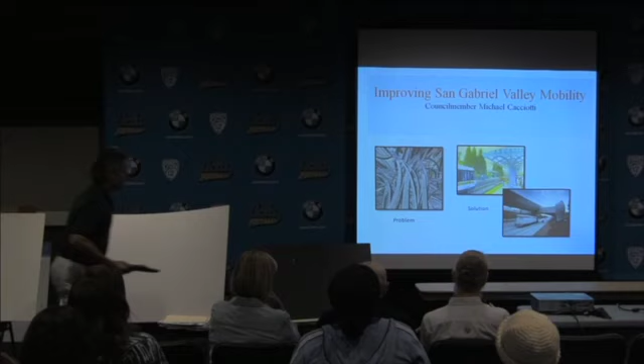Thanks, John. You did a lot of research on us here. Excuse the dress—I just came from a mulch compost giveaway in South Pasadena where we were shoveling for about 2 hours. A little dirty, I didn't have time to change on the way over here. We're very active. Claire, thanks a lot.

I'll go through it—if John or Claire just want to jump in, feel free. We'll title this 'Improving San Gabriel Valley Mobility' because Caltrans is always focusing on just this north-south, one little tunnel type of thing. We're looking at the big picture.

I'm going to put it in perspective today for you. The problem is what would be created by more freeways, more tunnels—almost a spider of freeways and junctions. The solution we really feel is mass transportation: light rail, heavy rail, etc. You've got the iconic bridge structure there over Baldwin near the 210 eastbound.

So, a little perspective—let's go back to 1944, World War II era. This was the Pacific Electric Railway, and this was their footprint at its height. Look here: 4 counties.

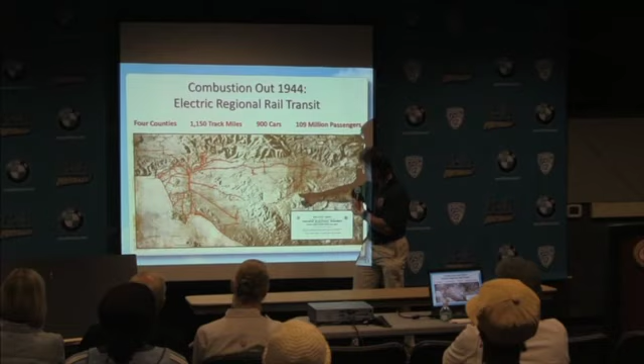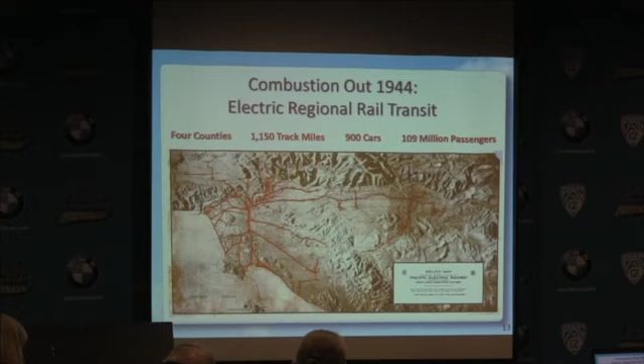I also sit on the South Coast AQMD—these are our 4 counties: LA, Orange, San Bernardino, Riverside. Look at this system all the way to San Bernardino, all the way to Riverside, all the way to Orange County, along the beaches, Pasadena, all this area along the foothills, San Gabriel Mountains, San Bernardino Mountains. That was a system that existed in 1944, started in the late 1800s with the railroads.

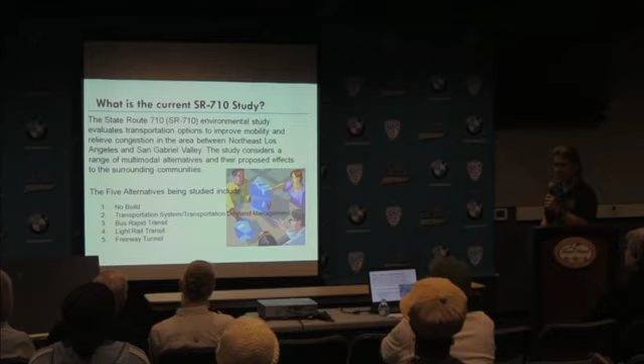Look at it—109 million passengers every year, 1,150 miles of track. We're getting back to that. So what's this current study Claire was talking about? Just some bullet points called the SR 710 Environmental Study. What are they evaluating? Let's look at what Caltrans and Metro are doing.

Transportation options to improve mobility. How can we get people from A to C or A to D fast? Relieve congestion, all the backup on our freeways.

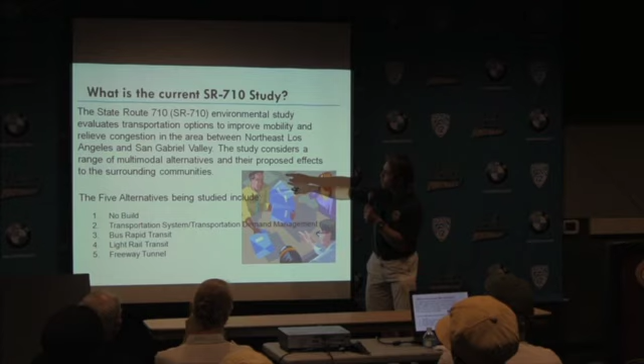Northeast, let's look at the area. Northeast Los Angeles, San Gabriel Valley, they consider a range of multimodal alternatives to propose effects. Here are the 5 alternatives.

And these are the final 5 they're studying. They're having meetings every month. There's a meeting this Thursday. They have different groups - one I go to is called the Stakeholder SOAC, Stakeholder Outreach Advisory Committee. They allow us elected officials and committee leaders to come. They kind of just tell us, and we always raise our hand and I protest. They take the minutes down, but they don't listen.

So here's the 5 alternatives: no-build, transportation system and demand management, bus, light rail, freeway tunnel.

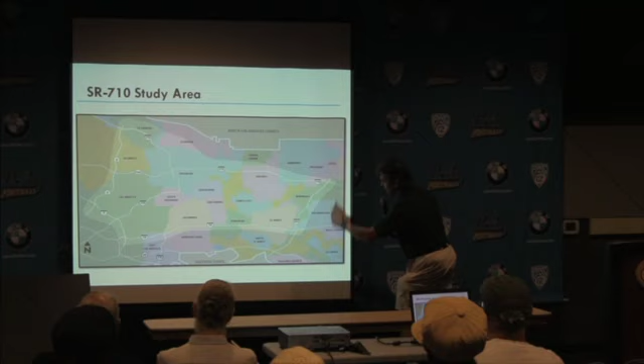Let's look at these. Now, this is the study area. Imagine what we did - they almost took a hand where the 710 kind of stops right here, and they looked west, straight, and all the way out east. So we're looking at the 60, the 10, the 210, all the way out here to the 605, Baldwin Park, West Covina. But notice over here too, they kind of taken Glendale, Northeast Los Angeles, all the downtown area over here. So this is kind of their study area.

You try to understand what Caltrans and Metro are looking at. This is a study area that they're going to assess. Now, they developed this purpose, and we feel they really got to re-examine it. I'm not sure if it's accurate.

The lack of continuous north-south transportation facilities in the study area affects overall efficiency of the larger regional transportation system. So it contributes to cut-through traffic. So this is their purpose. This is why we're doing a study. And there's a problem with traffic in north-south.

But we think what they forgot to do was look at east-west, and I'll show you in a little while. You're going to see along the 10, the 210, the 60 freeways why just looking north-south without putting this in perspective, without looking at these, all they're doing is looking at this. That's their purpose. So already at the beginning of the study, we think there's a flaw. You've got to really look at all the traffic, because traffic doesn't just go north-south - it comes in and goes downtown.

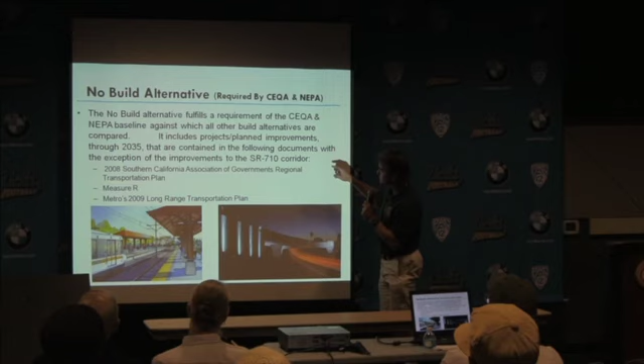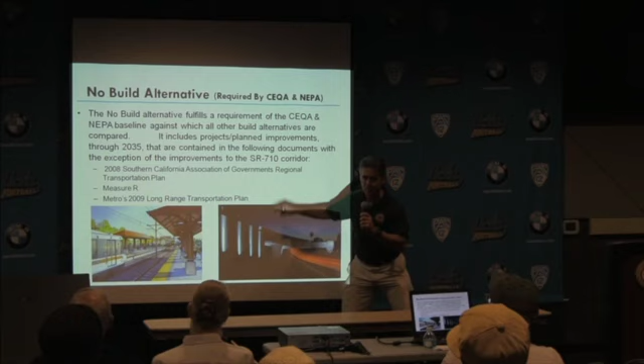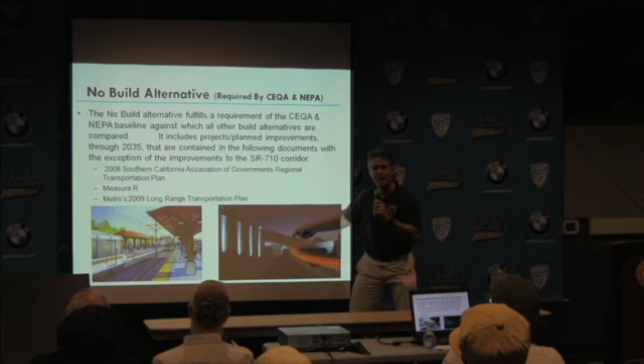Now, this is the first, the no-build alternative you saw. And that means we don't have to do anything. But why is this? It's required by NEPA, CEQA - California Environmental Quality Act, National Environmental Policy Act. So there's already a Southern California Association of Governments - that's 5 or 6 counties that come together, and they have what they call a Regional Transportation Plan, RTP. If you didn't build anything at all, if you didn't build the 710, whatever of those 5 options, just there - hundreds of projects, and Metro's dozens, hundreds of projects, would make massive improvements to transportation just by themselves, without even doing any improvements. They've got the Gold Line extension opening in 2015 to Azusa.

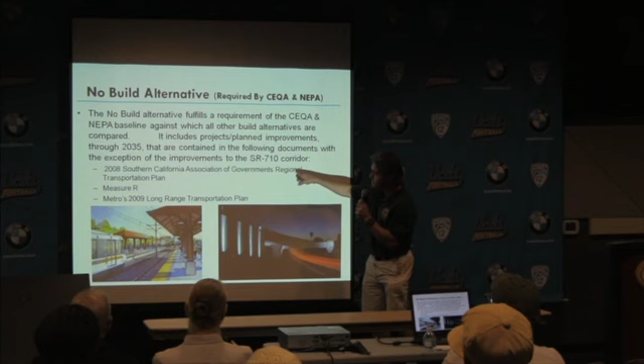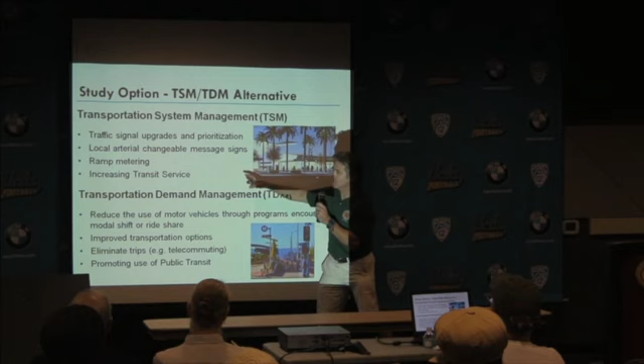So those are considered. Now, this is what they call TSM, TDM, the second alternative - we're actually combining 2 of them together here. Transportation System Management - all it is, where the 710 ends in the Valley, let's improve that junction, let's improve that intersection, get traffic off there and move more smoothly. Transportation Demand Management, basically promoting public transit.

Have you ever tried to take a bus? Some of our students, ask any of you to go to, take a bus out to Cal State LA, take a bus out to Cal Poly Pomona - how long does it take? So a couple of our students in South Pass go to Cal Poly Pomona, and I said, you know what, I'm going to go out with you one day and see how long it takes you to get out there.

How long do you think it took when I caught the bus at Mission and Garfield to get to Cal Poly Pomona? Two hours and ten minutes. Transfer in El Monte, in the middle of the street, an industrial area, sitting there for 20 minutes waiting for the next bus. It's got a good foundation, but it's a very poor system. It's got to improve significantly.

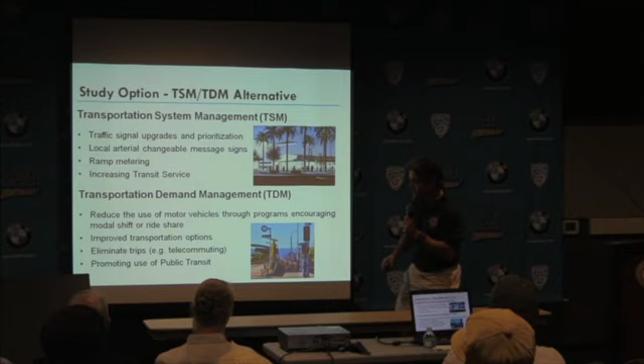So that's what these would do, really improve the system, so people can say I want to take a bus but I don't want to sit there and transfer three times to get to Cal Poly Pomona, sitting in the middle of El Monte in an industrial center at 7 a.m. It's not very safe.

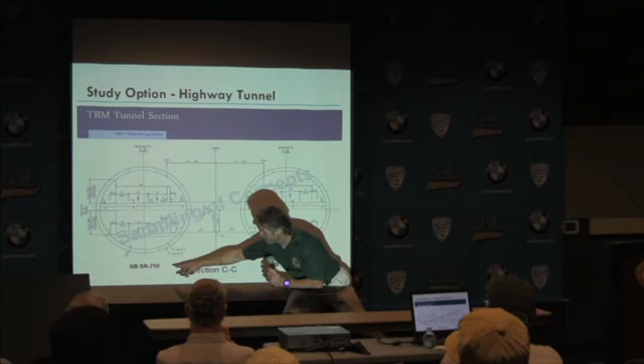So here's the tunnel option Claire talked about. This was a first: two twin-bore tunnels. There's one bore, here's the second bore. Southbound SR 710, northbound, two levels. Both going northbound at the top, both going northbound at the bottom, and you've got shoulders for emergency vehicles.

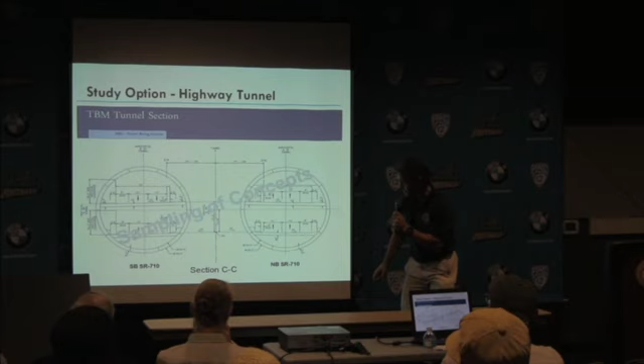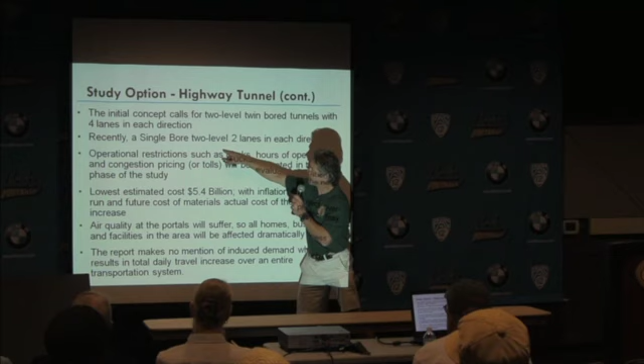Claire talked about the size. Recently they came up with the initial plan of two twin-bore tunnels with four lanes each direction. Just a couple months ago, they came up with a single-bore tunnel option. So instead of two, we'll have one. At the top, two will go north; at the bottom, two will go south. We're wondering why they're doing that. Maybe it's to save money and bring the price down. I'm not sure, but that just came out of nowhere recently, one of their revisions.

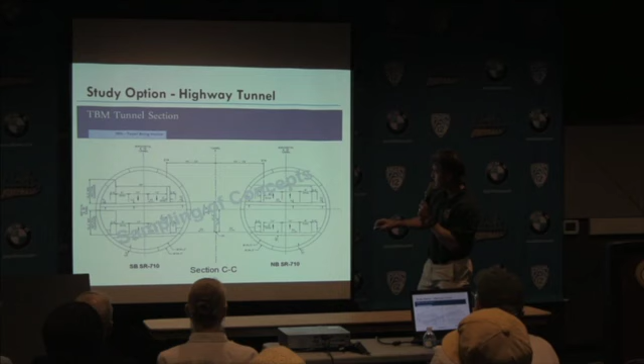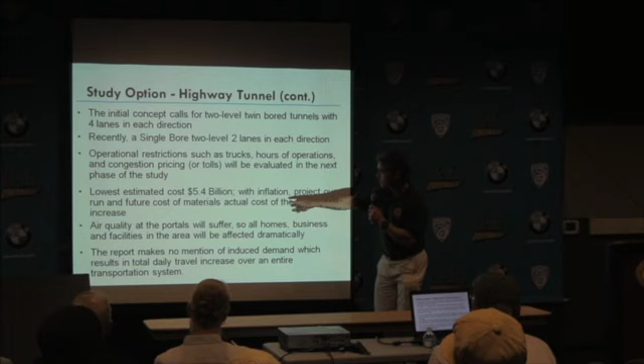Other operational things Claire talked about: will there be trucks? They say no, but we know the trucking industry, ports, goods movement, hours of operation, tolls—all these issues, we're not sure what's going to happen. They keep changing every month. The cost, $5.4 billion, has been estimated low. We've heard as high as $10 to $15 billion.

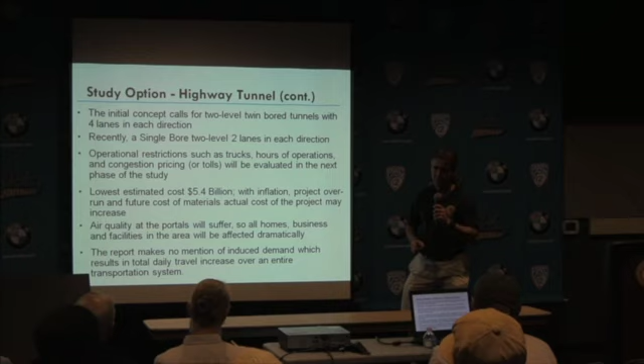Air quality in the portals as you come out—they say there's technology to test it. I'm on the AQMD board, I've been to Washington, met with the EPA. There's no guaranteed technology now that can actually clean it up. They say there is; I haven't seen it.

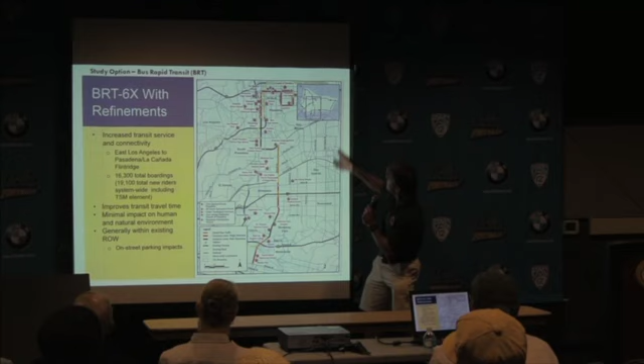So this is the other option: a bus, BRT, bus rapid transit. Let's start down here. This is the 60 freeway, up to the 10, the 210's up here, this is right around Atlantic. Just below the 60 they would improve the bus. There's already existing bus service, the 260 line. I've taken it a number of times, and I've ridden my bike down here.

So it starts here below the 60 and would go up. These different colors, yellow and brown, might mean some lanes are dedicated just for the bus, or shared. This section would be just dedicated for the bus. We haven't agreed to it at South Pass, but that's what they're trying to say—it would be a really rapid bus system, better than they have now, going all the way up. Which is good, we need that improvement.

Take the Gold Line where it starts up here, come all the way down through Los Angeles. You've got a great stop in Little Tokyo right there, some great restaurants, and you continue through Boyle Heights, get over to East LA Civic Center—the courthouse, the health department, the sheriff's station, the library—thousands of people using that. It ends right here at Atlantic, in the middle of nowhere, about 300 feet south of the 60.

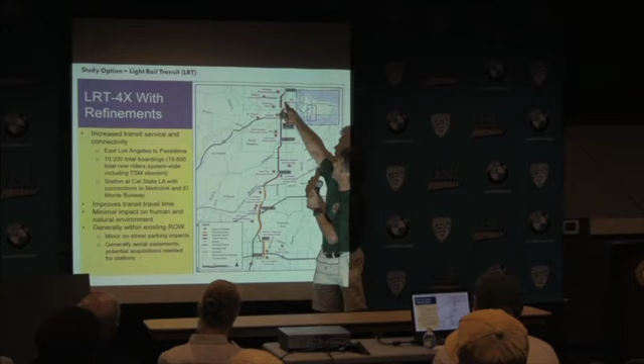What they want to do—and actually it's a nice start of an idea—is start a light rail that would go along the ground, then kind of go along the 710, elevated all the way to Cal State LA. Great, you've got 26,000 students or so at Cal State LA, stop there. Then continuing, when it hits Valley, go underground, stop in Alhambra, South Pass, connect up with Fillmore Station.

Now here's a problem—you know what they miss? Let me show you. Sam, can you turn that big one around? Is it turned around? Okay, look over here.

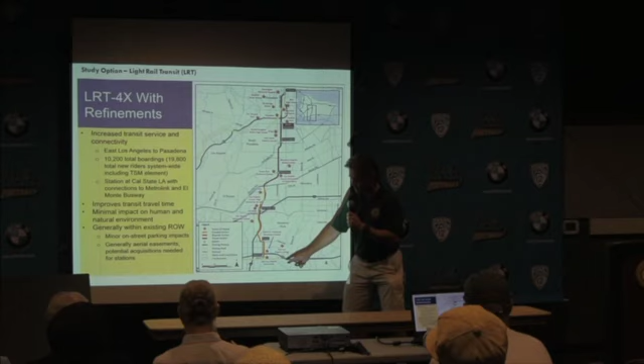They're going to measure how many cars go through the tunnel versus how many people are going to take the light rail. Well, it starts down here, it's going to stop in the middle of nowhere at Floral, and it'll get Cal State a lot of students - there's 26,000 students and teachers. That may get a couple cars off.

Guess what they're missing? We bring this up every time at the meeting, I'm there every month. You see something here that said East LA College? Guess what - if you look right here, the second stop right before the final stop where it ends, right below the 60, not even 0.7 of a mile north - I've walked it, I've done it on my car, I've done it on my bike - they will miss East LA College. Guess how many students go there?

36,000 students, thousands of teachers, dozens of sporting events each month in a stadium with soccer games, football games, baseball, softball. So they deliberately skipped it and go to this little street called Mednick, which I've been on my bike - there's nothing but a couple apartments, condos in the middle of nowhere. They're going to have a stop a mile from the university.

And I say, why don't you have a stop directly there? Why don't you start here and hit East LA College? Why are you going to miss it? It's right there. Oh, well, kids can walk 1 mile to school. You know something? I said, have you been out there to try it?

I rode my bike. So when you're out here, what you've got to do is as you get off of the Gold Line at its terminus, you walk towards the college at night. It's a little dark, a little scary. But not only that, you've got to cross 2 off-ramps and 2 on-ramps at the 60, cars flying off there in the industrial area, and then get up and cut over.

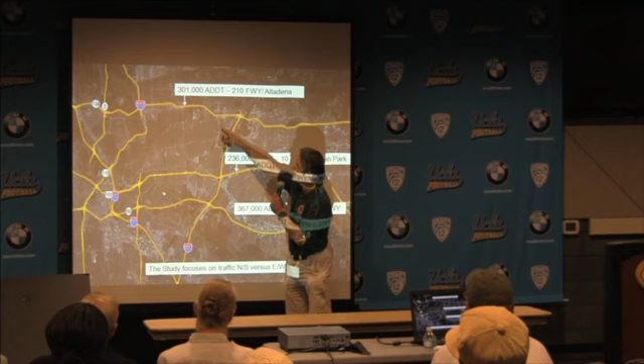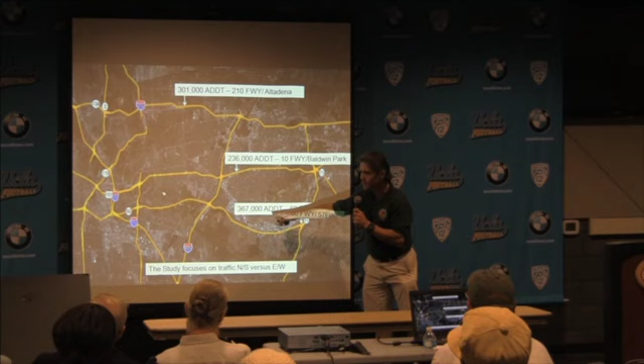These are ADT, average daily traffic volumes on the 710 freeway. In this area, here's the 605, so this is in your area between Pasadena, Arcadia, right here, Altadena - 301,000 cars a day average daily traffic. Here's the 10 freeway, Baldwin Park area right over here, 236,000 a day going eastward every single day. Now look right here, this is one of the busiest freeways in the region, probably the second busiest, right close to the 405. 367,000 vehicles a day on the 60 freeway, just once you get past the 57 right here going to downtown.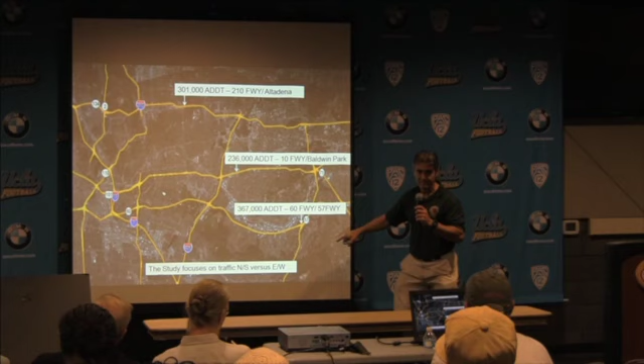So here's a problem, Caltrans - I want you to just put all these things in the back of your head, because when you make a decision, Caltrans is just saying no, we've got this little north-south stuff. What they forgot to do is the fastest growing counties in the state - guess where they are? Number 1, San Bernardino. Number 2, Riverside. Can you imagine what's going to happen to these over the next 10 years as the economy kicks back in? 300,000, 400,000, it's not going to move. And the goods movement, which a lot of this is goods movement coming out of the ports along here, is going to come to a standstill.

They talk about a gap closure. What happened the last time they closed the gap? Remember out here in the 210, they connected it out to the 15?

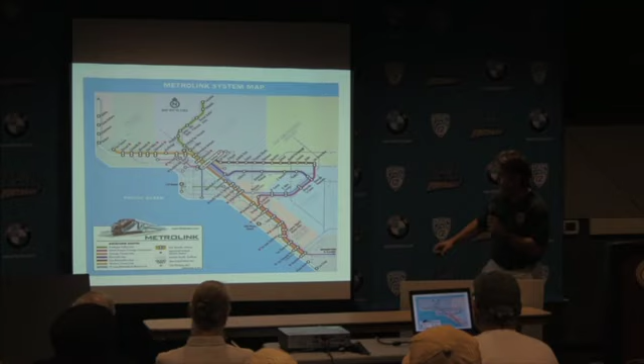This is just the Metrolink system itself. You see all the lines went out to San Bernardino, Riverside, Orange County. And if you haven't taken it, it's exciting. I've gone to 2 weddings in the summer down in Oceanside. You got off at San Juan Capistrano, took the cab right there. Exciting—the Metrolink system's really good now.

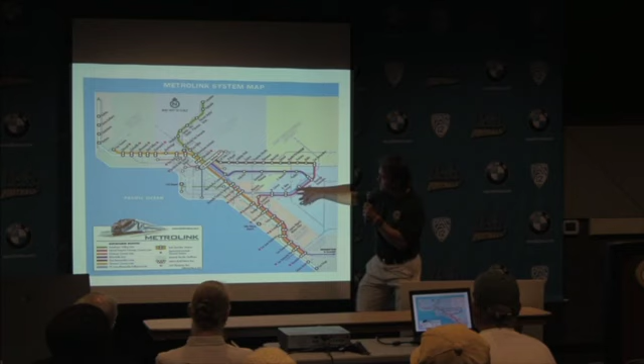Most people take it. It goes to Burbank Airport, all the way up. This is our current Metro system. Again, in 1990, none of this existed. None of this. So in the 60s when Caltrans was thinking, I don't blame them because none of this was here. This was the first system, the light rail system, the Blue Line down to Long Beach.

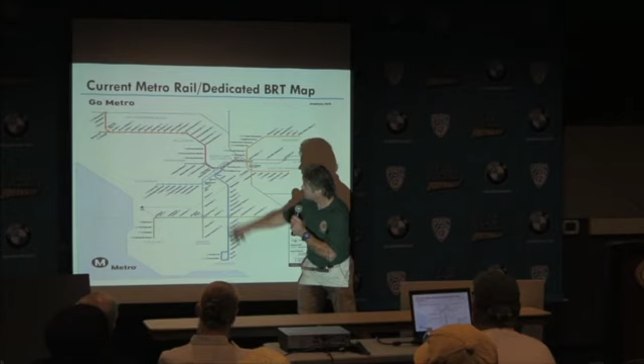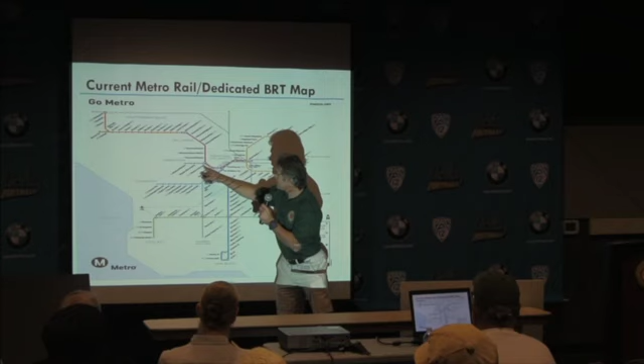There's 6 systems, 2 heavy rail. The 2 heavy rail: the Red Line system out here where it stops at North Hollywood, then you've got the Orange Line, and the Purple Line, which is pretty good. I've taken that just last week, had to go to Western and Wilshire, and it starts at downtown Union Station, at the Gold Line, etc.

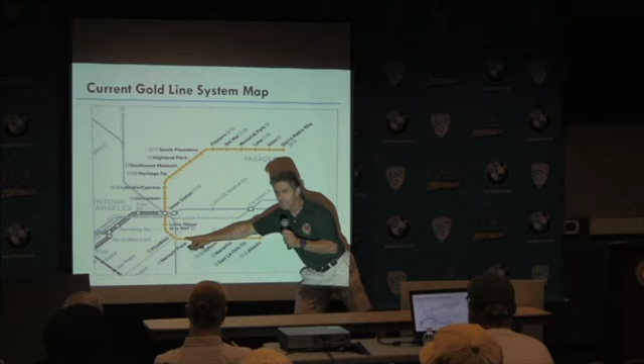So this is our current system, which is excellent. This is the Gold Line system, as you see, Sierra Madre. Please take it one time just to get the feel down here at Atlantic. It only takes about 35 minutes from South Pasadena to get there.

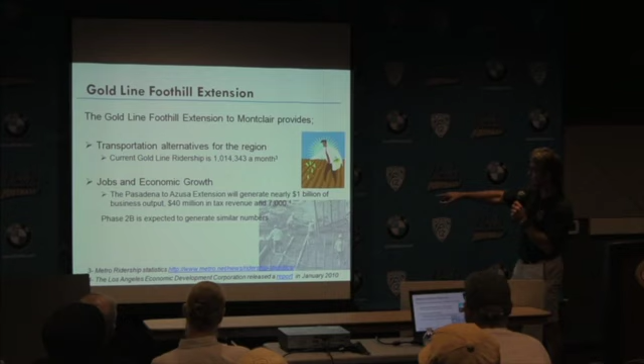Gold Line Foothill extension to Montclair, tells you just transportation about it, what you're doing, the jobs, the growth. Gold Line extension, how much it costs, $735 million out to Azusa, then Azusa to Montclair, $850 million, which we don't have yet.

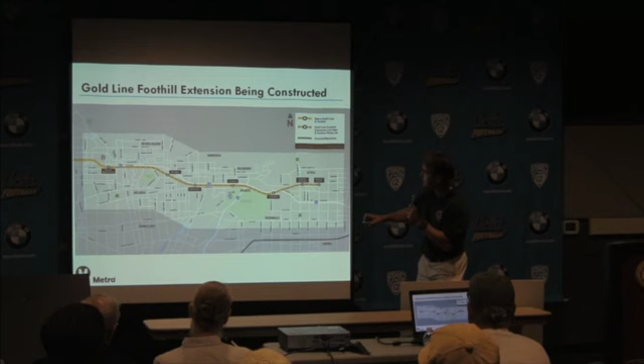Azusa, Irwindale, Duarte, Monrovia, Arcadia. Look at all the exciting things at all the different stations - Ontario Airport, Claremont, Azusa Station, Citrus College. These are right next to each other, right off Citrus on the 210, just north about a mile.

Here's the benefits and bad things that Claire talked about actually. And this is your lungs. Metro and Caltrans say when you open a freeway, it's going to reduce pollution. There's no way - you put another 200,000 cars here, it doesn't.

One of our studies here, let me find this one. We actually did a study in South Pasadena. We had 2 clean air car shows, actually 4 clean air car shows over the years. And we had one where we did a test. I'm your representative on the South Coast Air Quality Management District Board.

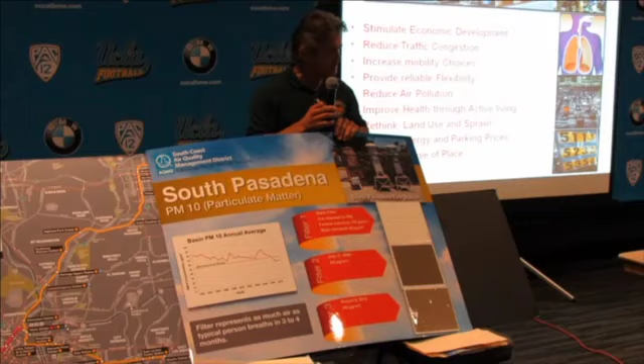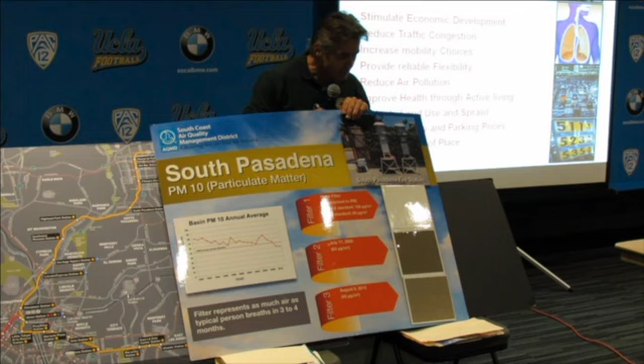So we said, you see these 2 samplers right here? We sampled along Fremont near Mission, right before we get to the 110 freeway there. And we just tested PM, particulate matter - that's stuff that comes from cars, from dust being blown up, from power plants. It's solid particles and kind of liquid particles that get together and you inhale. It causes respiratory problems, things like that. So bad for your health.

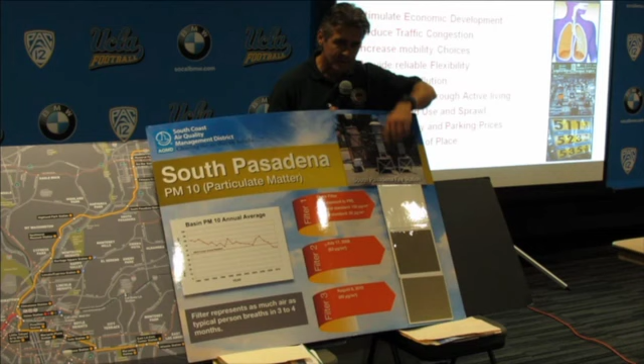So we tested. This was what the filter looked like before we tested, and that's what it looked like after we tested in 2008. And that should have been the 2012 test - actually 12 was better, and the main reason was because the economy went down, less cars on the road. But both exceeded the state standards for healthy air. So that's the air we're breathing in our region right now. And these are the tests that we've done at AQMD, our chemists and scientists have done. There's no way it's going to get better if a freeway is built.

Again, just says more benefits of the stations - economic benefits, billions of dollars, sense of place. Why not, we're saying, why not build out west instead of a tunnel? Take a light rail system out to Bob Hope Airport. Take it so it goes by Glendale Community College, the Americana. Have a light rail system out there.

Just a couple thoughts in closing. Light rail, will it be successful? Here we have the opening of the Gold Line in 2003. 361,000 - look on this side, your left - 361,000 people per month ridership. What's that, about 12,000 a day? Look what it is today.

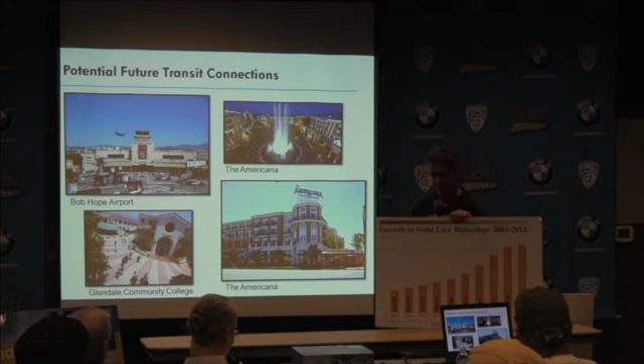In 2013, almost 1.1 million people a month rode it. When that opens up in September 2015 to Azusa, you're going to see that number go up exponentially. And if you've taken the Gold Line like I do every week or every other week, riding my bike on it or taking it to work downtown, sometimes I can't even get on.

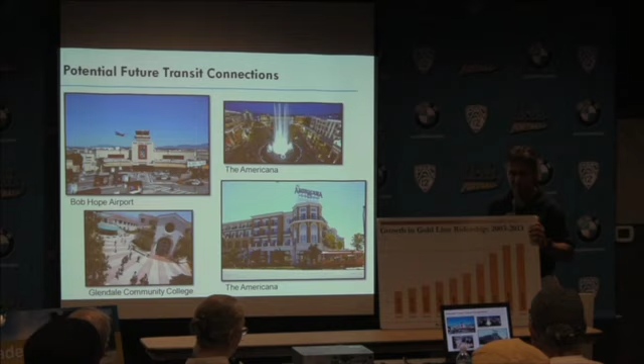It's so packed at rush hour. The secret is, downtown, if you've got to get on the Gold Line, walk over to Little Tokyo Station, because at Union Station you're going to get on but you'll be squished and standing the whole way. It's that successful. I told the council of governments, the mayors, and Mr. Pedroza from Claremont, I said, Sam, you better add more trains. The problem now is you've got 6-minute headways, going to 5-minute headways, it's going to be incredible when this opens up.

Imagine when that goes all the way out to Montclair and the airport. So, big things. Thank you very much for your time.

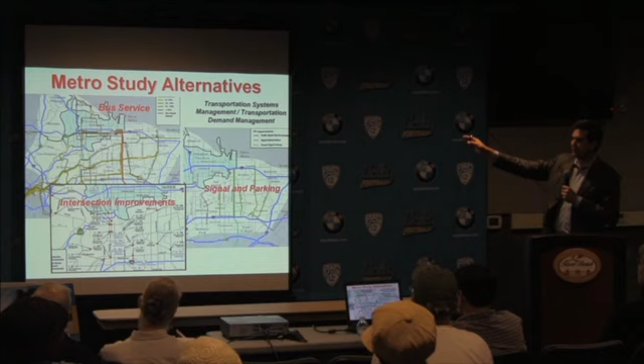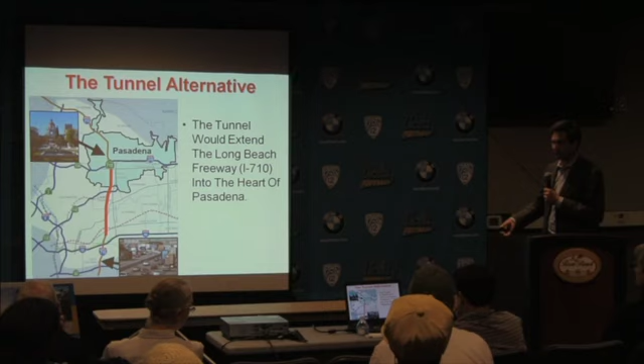While there are a number of alternatives being studied, and I won't go into a lot of detail now because Mike already did—the bus rapid transit alternative, the light rail alternative, the TSM/TDM alternative that Mike also explained—the truth of the matter is this study is really geared towards justifying the tunnel. The reason all of these are being studied is so an environmental impact report can be completed where Metro can say, yes, we did study all these other alternatives. But the big money, the political interests, are clearly behind this alternative, which is the tunnel. As you can see, it starts down here in East LA, Alhambra area, and heads right up into the heart of Pasadena.

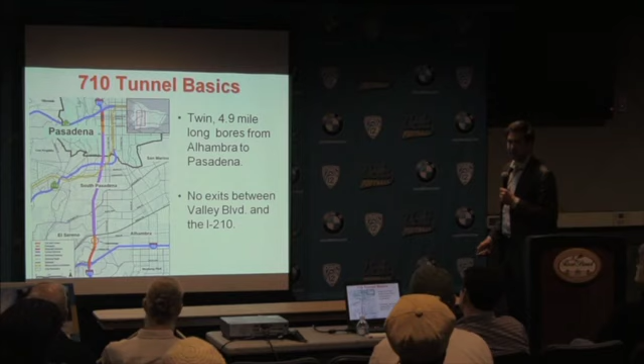So some tunnel basics, and Claire and Mike already covered some of these. They're twin, whether they're 5 mile or 4.9 mile, I'm not going to debate. Whatever they are, they're very long tunnels. There would be no exits from the time you leave Valley Boulevard all the way up to the 210 freeway in Pasadena. We'll talk a little more about that in a moment because it has significant impacts for this neighborhood in particular. Mike gave you a sketch of what the tunnels look like.

And as Claire said, there'll be no exits for this tunnel, no access, no ways out for miles. So if there is an emergency in this tunnel, for example a fire, the only way to get out is to walk through. There'll be little passageways that go through to the other tunnel.

However, what Mike told you, and it's really quite disturbing, is that because Metro is now realizing that the cost of building both of these tunnels may be more than they can afford at this time, they're talking about building just one of them now. Well, if there's just one of them now, and you're 2 or 3 miles away from the end of the tunnel, there's not going to be a walkway over to the other tunnel.

You're just going to be stuck in this tunnel with whatever is happening in it. So Metro has yet to explain to us what the emergency protocol is going to be if there's only one of these tunnels. So here it's no exits for 5 miles. There's traffic stops. There's no way out. You can't back up. You're just going to sit there.

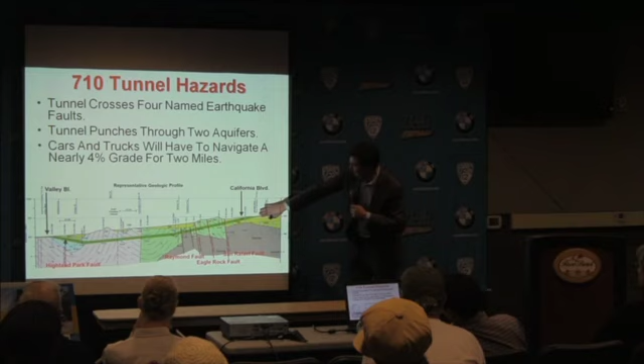Claire talked about the tunnel crossing earthquake faults. This is a profile of the tunnel, and just so you understand, this is the Pasadena end here, and that's the Alhambra, East LA end down there. The green line is the profile of the tunnel itself as it would dig underneath the different neighborhoods. This here is basically like where Raymond Hill is, right where South Pasadena starts, down into South Pasadena, down into El Sereno.

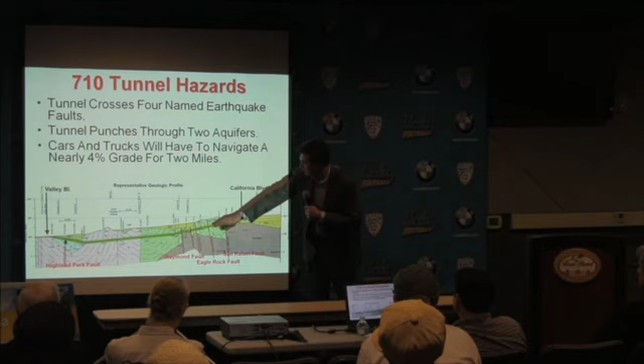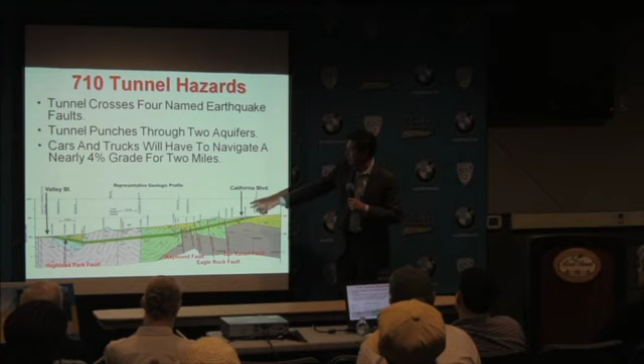The red lines are earthquake faults, known earthquake faults, including the Raymond fault, which is a fairly significant fault. People who live down near the Huntington Hotel know this is a reason why the land actually drops there behind the Huntington Hotel, and you get that beautiful view. It's because there's an earthquake fault there, and that's right here. So this tunnel is going to cross all of these earthquake faults. That's not unprecedented. There are tunnels that do cross earthquake faults, but it does add to the risk and it adds to the engineering and to the cost of doing this.

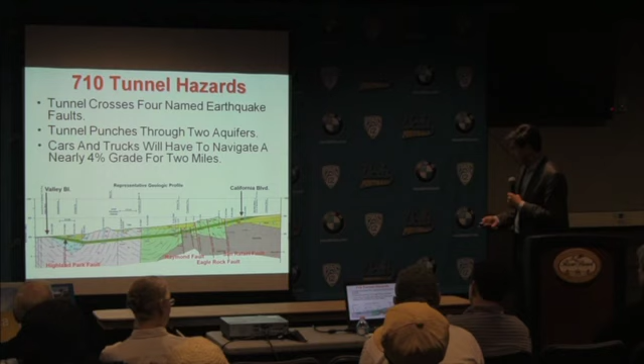Now, how are they going to pay for that? Well, they have $700 million or more of your tax money right now, your sales tax money, to pay for some of this.

But $700 million doesn't get you to $5.6 billion, does it? So they're going to have to come up with other ways to finance this. And clearly one of those ways is going to be with tolling. We've heard numbers, $5 to $15 a toll trip, but it could be more.

And you'll see that - we're going to talk about trucks in a moment. This is one of the reasons why there are going to be a lot of trucks in this tunnel, because the only way they're going to get those kind of tolls, $15 or more, is from truck drivers. So they need the truck drivers in order to pay for the tunnel. And that is a serious concern for us.

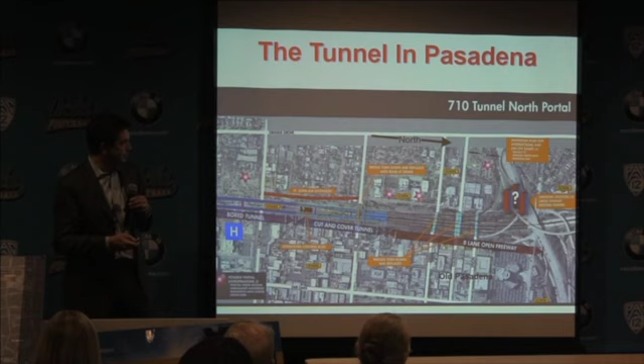And you can just imagine the disruption for the city during that time. I'll talk a little bit more about the construction disruption in a moment. I want to go through what I call the myths of the tunnel.

The first myth being there won't be a lot of trucks. Now, Claire told you that the city of Pasadena did have a referendum - it was more than a decade ago - and the majority of people in the city did vote to complete the Long Beach Freeway. I respect that. I believe in the democratic process. If voters say they want something, I do believe politicians should listen, and I fully respect that.

However, what was sold to the voters in 2001 was a freeway with a truck ban. All of the advertising for that initiative said there would be a truck ban. Right now, they are saying, well, we'll consider a truck ban, but as you saw with those numbers, they can't, because they can't build it without trucks.

And if you look, there's a natural reason why the trucking industry wants this tunnel. Down here, not just the ports, but also all of the industry that you have down in the southern part of Los Angeles County and spreading over in Orange County, needs a way out. And I respect that, again, because the ports are an important part of our economy.

But the route that they are considering, the way out, is right through our neighborhood. It's to move trucks up the 710 freeway and then either up the 210 towards the Grapevine or out the 210 towards the Inland Empire. And if you look at different things that Metro itself has put out over time, it's talked about the significant traffic from the port area heading towards major distribution areas.

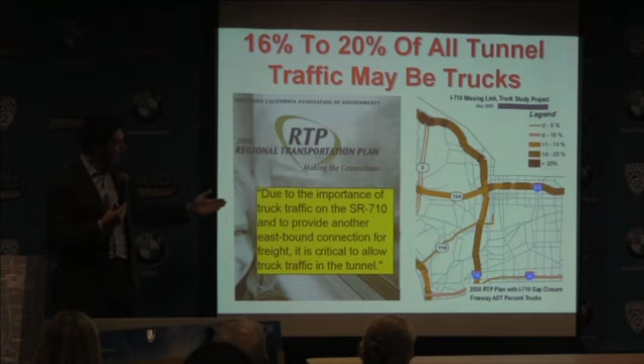This is what the Southern California Association of Governments has said. This is a study they did themselves a few years ago that they've since withdrawn and taken off every website, because they don't want the public to see it. And it shows the impact of trucks coming out of the tunnel.

So here's the tunnel. Here's where we are today, right where my finger is. You can see the percentage of traffic that will be on these freeways that's truck traffic once the tunnel is completed - over 20% in the dark areas, 16 to 20% in this entire corridor through northwest Pasadena. Also significant truck traffic going out the 210 freeway through east Pasadena. This is a truck funnel, and it's pointed right at us.

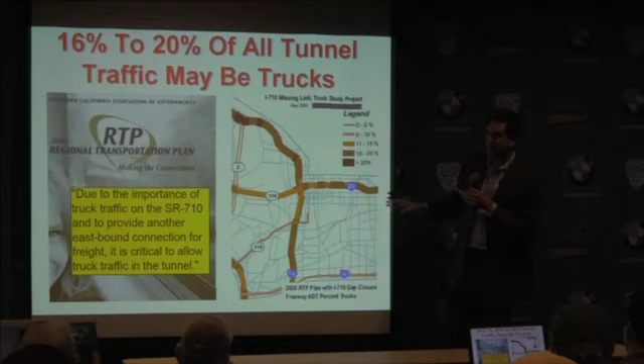They say the 710 will ease congestion - not just don't worry about the trucks, but they're also saying the 710 is going to be a godsend in terms of clearing congestion out of our freeways and out of Pasadena. Not true. Mike and I share slides, so we're both very familiar with what happened 10 years ago when the 210 freeway opened further east.

I'll admit that if you're trying to get out to Big Bear or something, it's really nice that freeway opened up out there for that purpose. But we all know what it did to the 210 freeway here through Pasadena - it made traffic much worse. But that's not what they told us.

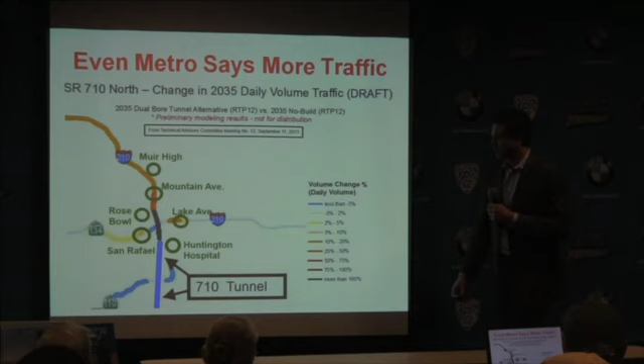Now what's going to happen here? This is Metro's own study, so you have to take it with a grain of salt - this is best case. This is from Metro's latest report, put out just about a month ago. Here's the tunnel coming up into Pasadena. Significant increases in traffic all the way up here through northwest Pasadena on the 210, because that's where the cars are principally going to go.

More traffic going through West Pasadena on the 134. Now, Metro thinks there isn't going to be much of a change on the 210. I don't believe it, but like I said, this is best case - except they do admit that, because there isn't going to be an exit until you get onto the 210, Lake Avenue is going to be getting a lot worse.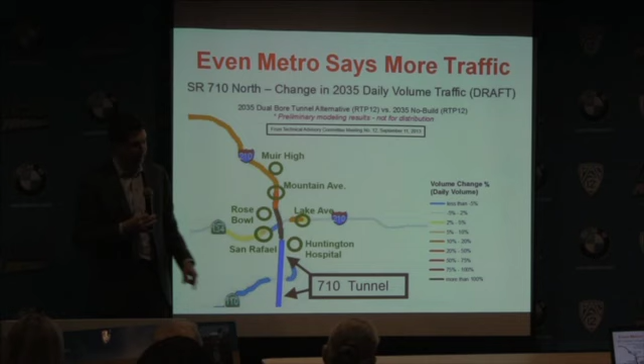This is another study that was done, and I know this is a little bit hard to focus on, but what you should actually focus on is: this is without the tunnel, and this is with the tunnel. More pleasing colors like green mean no traffic, and more warning colors like red mean lots of traffic. There are a couple of things I want to point out in this map - this is if they don't build the tunnel, this is if they do build the tunnel.

So this is Los Robles Avenue - one of the main rationales for this tunnel is let's take cars off the local streets. Los Robles, it shows, is a congested street, we all know that - red. But with the tunnel, no difference. Here's where the difference is.

Up here through northwest Pasadena, the 210 freeway, once you get past this awful interchange, is actually a fairly tolerable freeway. But with the tunnel, red.

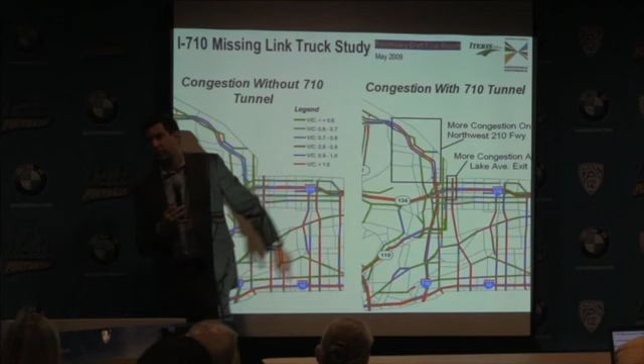They're going to take the congestion problem and bring it to this neighborhood. We're talking about more congestion with the tolls. There are going to be a lot of people who want to pay the toll, get off the freeway, and drive through your neighborhoods. It doesn't make things better, it makes things worse. The tunnel releases pollution.

This is one of the biggest myths of all. This is the 'we had to burn the village in order to save it' argument. Essentially, by building more freeways, we're going to make your air cleaner. It's a silly argument, yet you'll hear them repeat it over and over, and it's simply not true.

It is true that idling cars pollute a lot. If you park a car and leave its engine on, it's going to pollute an infinite amount per mile because it's not moving but it's polluting. So when a car is standing still, pollution per mile is very high. But once you get up into average driving speeds, after that initial improvement, pollution starts to increase again. So when you get up to freeway speeds, which is what they're trying to achieve, cars actually pollute as much at freeway speeds as they do at idling speeds.

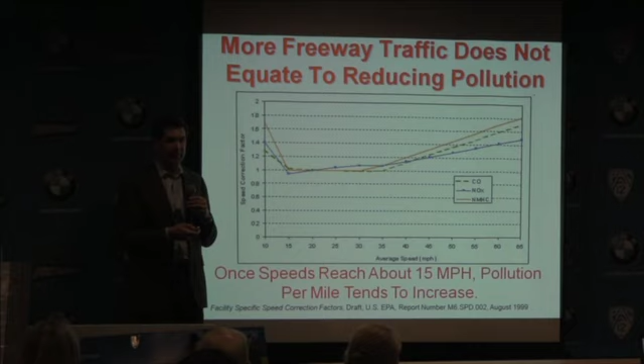Construction will not hurt Pasadena? Well, this is just to give you an image of our future. This is a tunnel boring machine. This one was actually small, there's people down there. It's actually smaller than the tunnel boring machine they'd have to use here, because our tunnel is even bigger than that. It's kind of cool if you like watching the Science Channel, but I just don't really want it here, thank you.

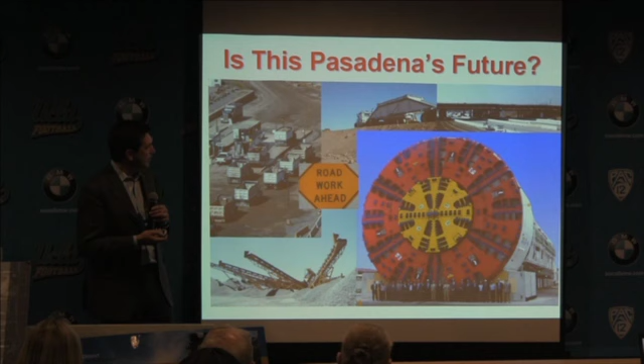So they're actually putting one of these monsters into the ground. Here you can see the impact on Pasadena. This is Pasadena, here's the Rose Bowl, here's where we are today, here's the tunnel coming up to Purple, Huntington Hospital again. This is ground zero construction, this is where the current ditch is right now. They're about to dig it from 35 feet down to 100. All that dirt, plus 5 miles of tunnel dirt, is going to have to go somewhere.

They're going to take a lot out down at the south end for the El Sereno people to deal with, but we're going to get at least half of it ourselves. About 500,000 truckloads coming out of here, either going north on the 210 to dump it out in the desert, or east on the 210 to dump it out in the gravel pits in Irwindale. One way or another, we're going to have years of these trucks coming out of here and going onto our freeways.

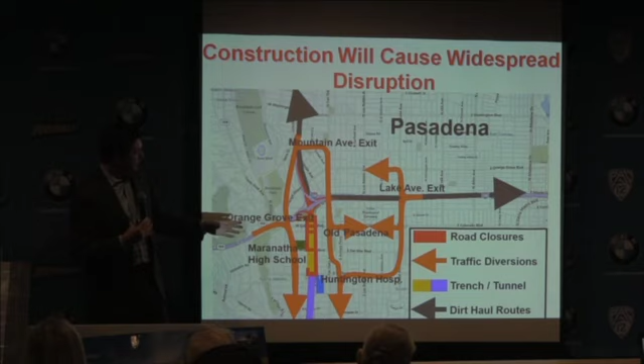In the meantime, they're going to close roads because they're going to tear down all these bridges and rebuild them. So there will be massive road closures in all this area where the red is. And there will be a long period of time, 5, 6, 8 years, where you're neither going to have the benefit of the completed tunnel, whatever that is in terms of traffic, nor are you going to have the exits at Del Mar and California open, or these streets open down here.

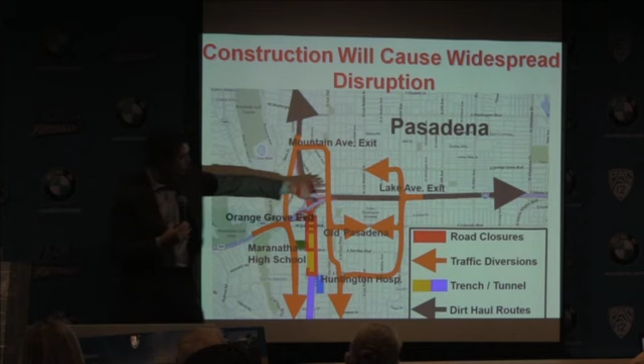So you can think about, plus you've got 500,000 truckloads full of dirt, what the congestion will be. It will be a lot more people getting off here at Mountain, a lot more people having to get off at Orange Grove, a lot more people having to get off at Lake, and then backtrack into Pasadena to avoid the construction area.

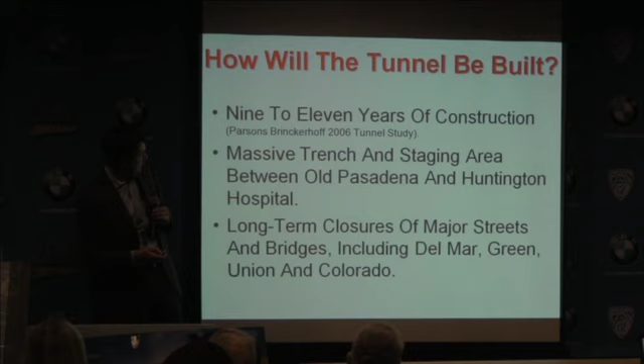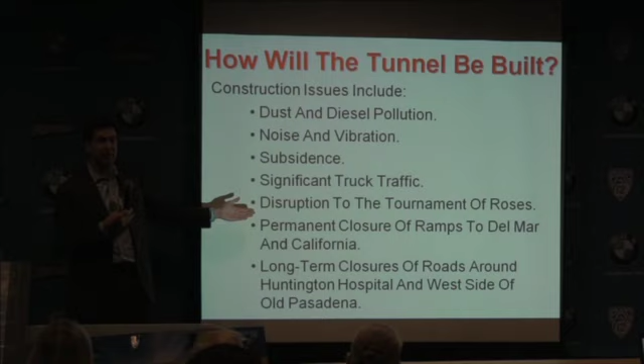And that's why, and frankly, because our city has not yet stood up to it and said no. Unlike Beverly Hills, unlike Malibu, unlike the San Fernando Valley, we have not stopped it. Now there are alternatives, and Mike talked a lot about them. It's not that I oppose everything. Like I said, I drive in traffic. I get it. I want things to be better, but I want intelligent things to make things better.

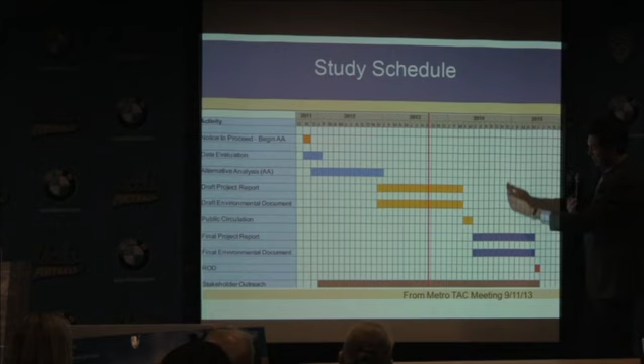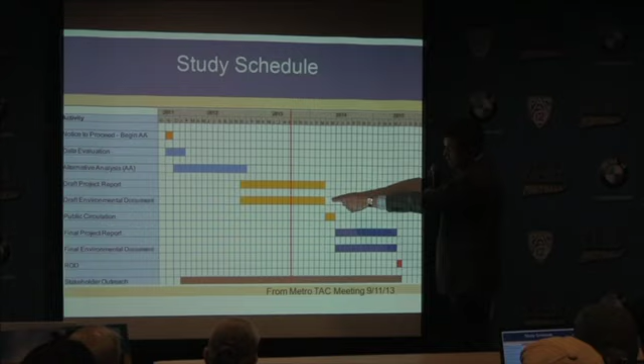And to the right is this red dot here, which means they start building it. And they are planning on, and notwithstanding all the complaints, the protests, the questions, the doubts, this red line keeps moving, and as you can see, the environmental impact draft will be out come February or March of next year. Our city will only have 90 days or so to actually review this beast, which will be like 6 phone books stacked on top of each other. And then they will go on to finalize it and build it unless it gets stopped.

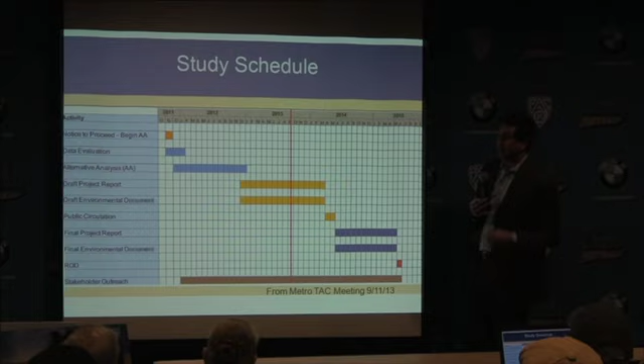So with that, thank you very much.

And I think Claire... thank you very much, John. What we're going to do...

The 710 South, the area south of the 60 freeway down to Long Beach, is requiring that trucks that use those special lanes...